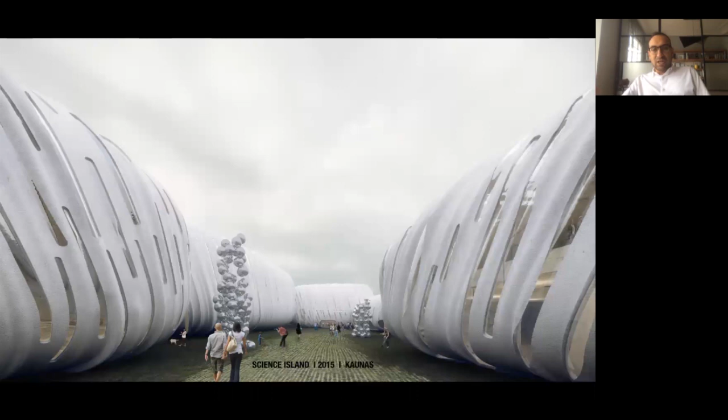So we looked at skins, organic skins, and looking at those, we come across Alan Turing's morphogenesis approach, morphogenesis theorem, let's say, where he wanted to make a mathematical background for these organic forms and relationships. By replicating this, we were able to generate openings and surfaces that relate to the surrounding in a more natural way.

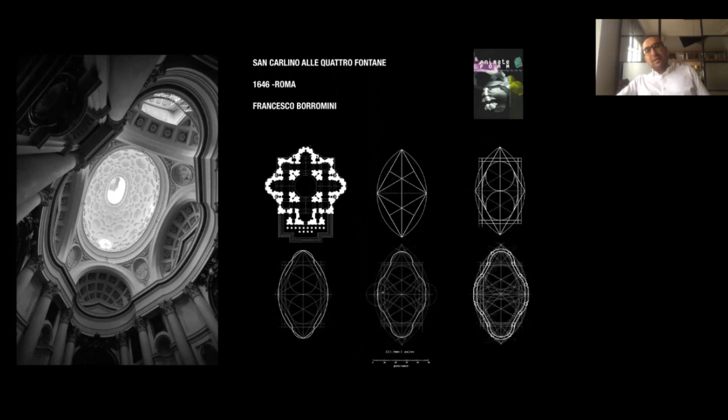But the beauty of it, I think, comes from how it is able to manipulate a small zone and site, which is not ideal for church building maybe, or maybe it's not the greatest church building site, let's say. But Borromini, who was by that time a young, very ambitious architect, painter, and also sculptor, used a strategy that defines new shapes and makes new forms, but it still is based on the same genetic code of the Trinity plan. So it still is a church, but recreated from its main ideas. There's a genetic point that this idea is rooted from. Another...

Example, maybe we tested a similar idea, was Augmented Structures, which we designed and built together with Refik Anadol in 2011. Maybe the time is important, because in 2011, at least to that date, we didn't see this kind of large-scale installation combined with digital footage.

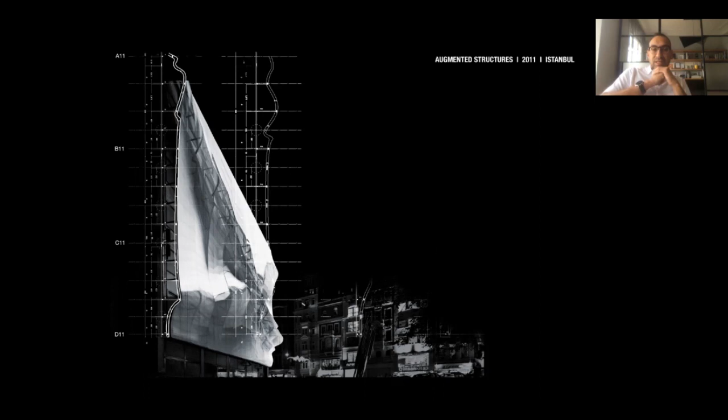This became real through a lot of constraints. We needed to build it in a very short time, in pieces, and we needed to combine it with a digital surface, so we didn't have any chance of making mistakes. It needed to be completely the same as the three-dimensional form generated in the PC. So designing it was a big challenge.

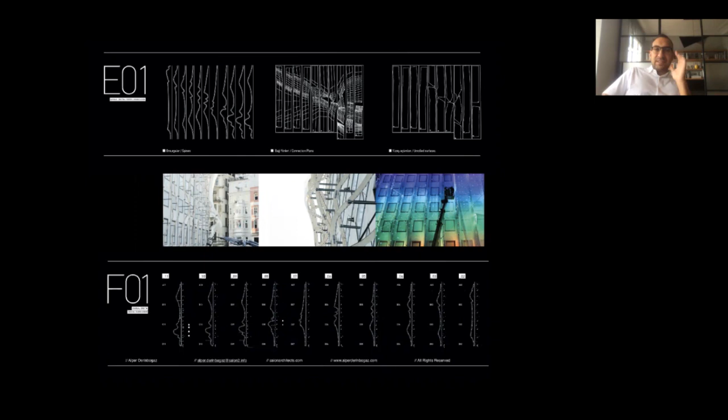Fabricating the surface was another challenge, and these are kind of residue from the process where we tried to capture the precise three-dimensional morphology and translate it into surface. You can see how CNC and all the CAD/CAM technologies were applied in the process.

There's a small video. The voices - if you can hear the voice of the installation - but this is online, and maybe if you are curious, you can go ahead and see the whole performance.

So time and the three-dimensional surface come together and become the architectural experience together. In that sense, I think it's a very interesting example in our practice also.

Another project on Istiklal Street in Istanbul, very close by to this Yapı Kredi Culture Center, was Fitaş Passage. So this project was also very much related with the facade, but beyond facade, it was a passage - but it had not been used as a passage for a very long time. It has been a movie theater, a shopping mall, offices, and a variety of things.

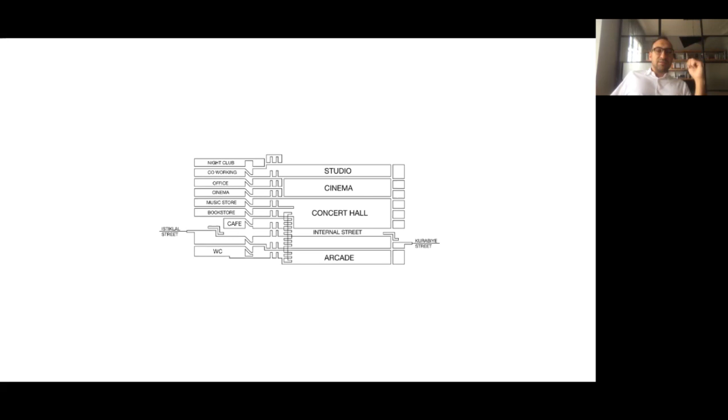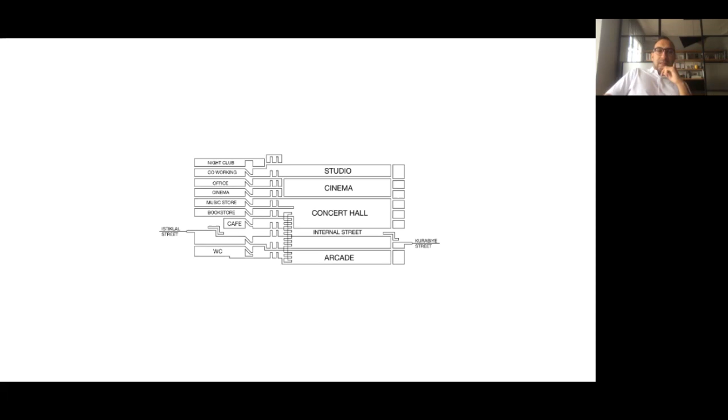So street and building become one, and this brings a new variety of spaces, also public spaces, into buildings, and buildings into streets. We thought this was important, to mix the public spaces together with the street.

So there's a texture on the surface, a spatial way of porosity on the surface. It goes up to the top floor in a different sense, so it kind of inspires you to go up into the building, we hope, at least.

Another project, where we were seeking a relationship with the surrounding, with time, and the space, was Ecotone.

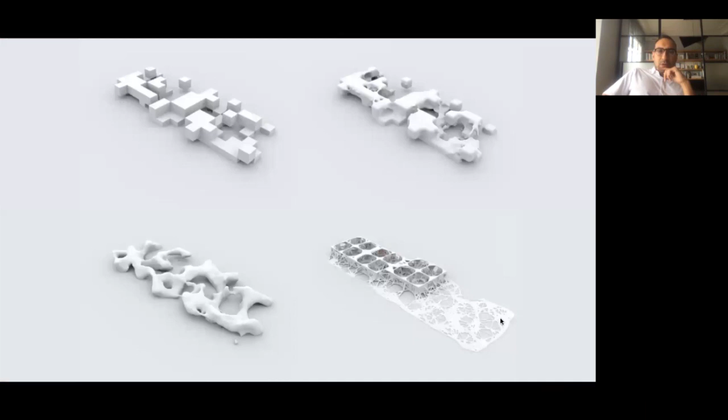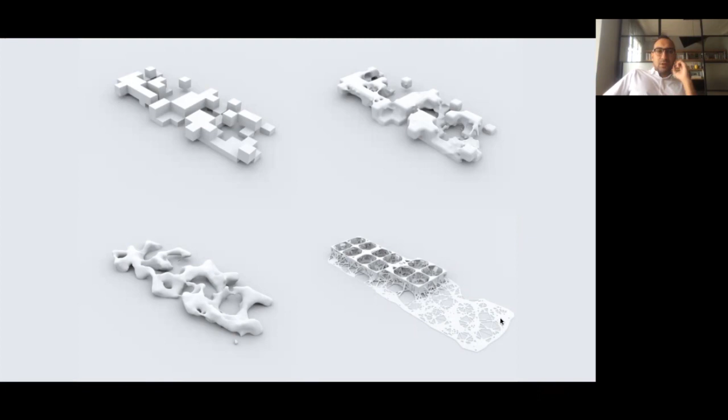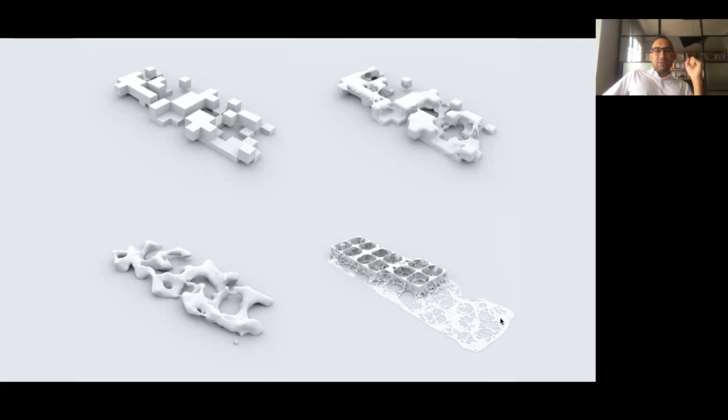So here in this project, we usually try to find relationship with the context, but in this case we wanted to create continuity between building components. When we are designing a building, we have certain building elements. We have spaces, empty spaces, full spaces, or elements like ceiling, walls, partitions, slabs, and all sorts of building elements. But we wanted to seek a continuity between these, so it becomes a holistic structure.

In doing that, we were mainly concerned by earthquake, because this building was proposed in a zone where we were not able to make foundations, so it would be a standing alone building. In this case, we wanted to come up with an idea that works against earthquakes, that is safe, but also not heavy—it doesn't exactly fight the earthquake, but works with the earthquake.

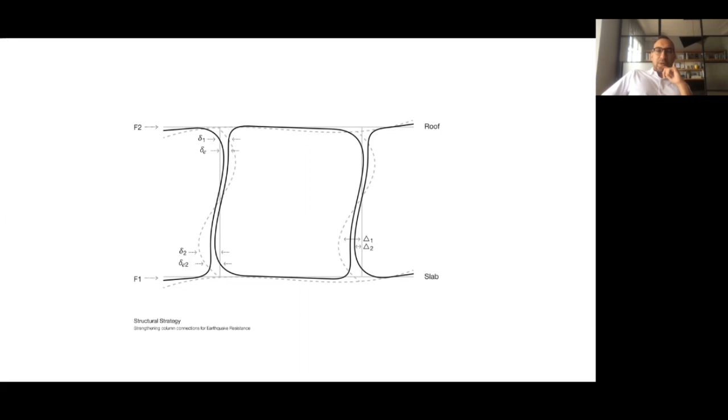So it becomes a more slender, more fluid space in that sense. And this is what we came up with: a column-to-column connection idea that is only thick where it is needed, and much narrower where it is not needed. So we kind of came up with an optimized column idea.

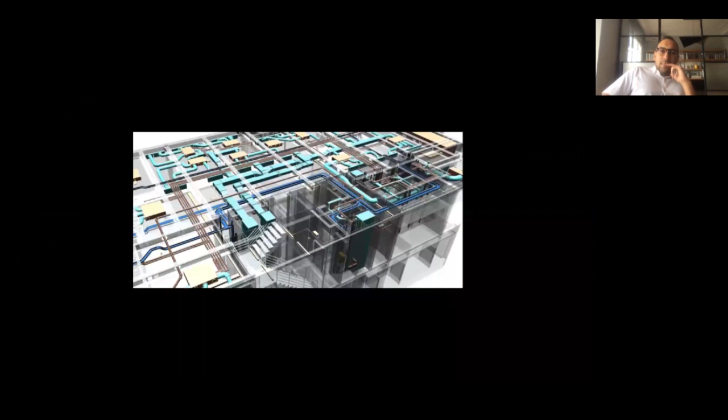Also, the spaces—the project is designed during the pandemic time. The spaces have a lot of meeting rooms that's outside, open out of the building. We also have spaces segregated in different pieces, so people can see each other, be still together, but they can also be in different rooms.

So we give a lot of importance to making a new type of office building where people can work together, feel together, enjoy together, but they are not necessarily in exactly the same air condition. They all have their own zones, which is much healthier for a pandemic situation. It's also nice because you can use exterior spaces extensively, and open spaces almost behave like closed spaces. So this was important to us.

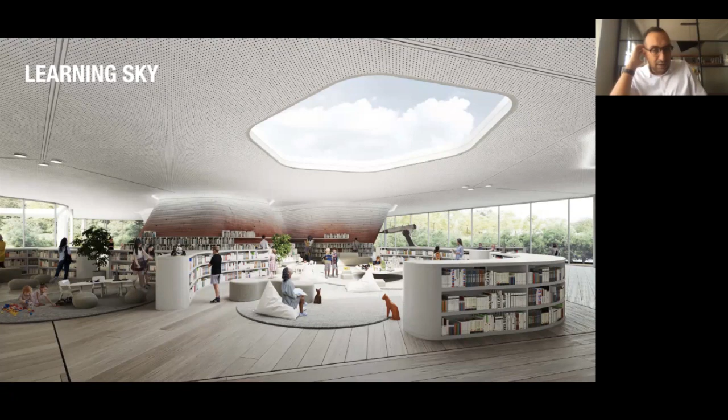Learning Sky is another project. We recently won an award in another international competition in Korea, in Songdo—the city of the future, as it's called.

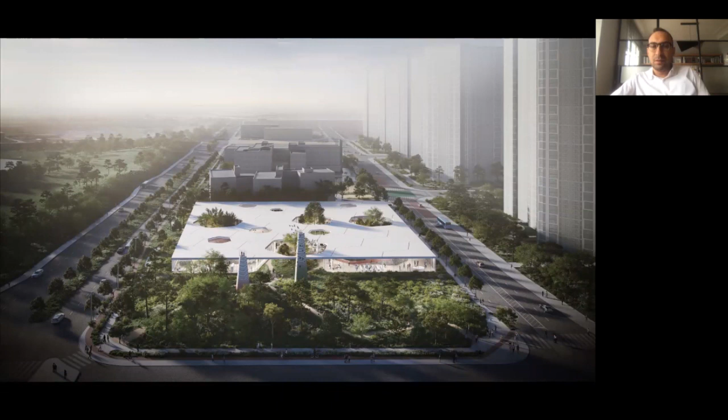Here we looked at the main libraries of Asian culture. We saw that a lot of the libraries don't have the exact Western library concept in Asia. As we went deeper into the subject, we discovered they have reading gardens rather than reading buildings. So we wanted to come up with an idea that is more about open spaces rather than closed spaces, and we were actually able to give a lot of nice places where you can read and enjoy nature.

And this was our main basic movement point.

Along the way we looked at the surrounding context, and we discovered it is located among a lot of innovation centers, some maker spaces, some factory buildings, and all that—which gave us the feeling that if you are making the future of the library, maybe it's not only about books, but also about making.

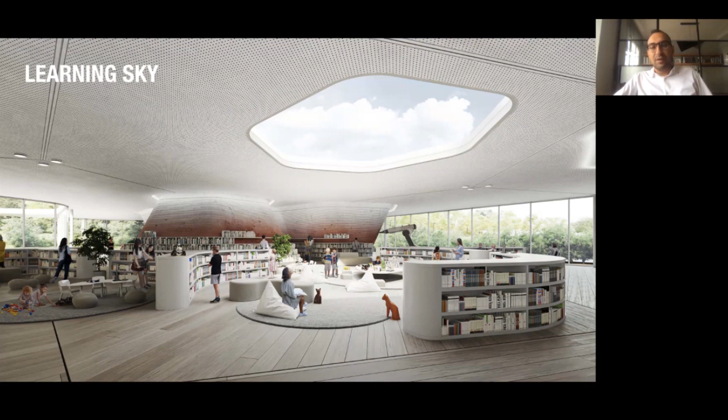So the making of the building is also part of this process. We came up with this idea where we build the building with 3D printers, because we believe printing changed the circulation of information and changes a lot of things. Information is not only written—it is sometimes three-dimensional, sometimes fabricated, and 3D printing is knowledge of form. If we come up with an idea that is also inspiring for making, then this becomes a culture throughout the experience.

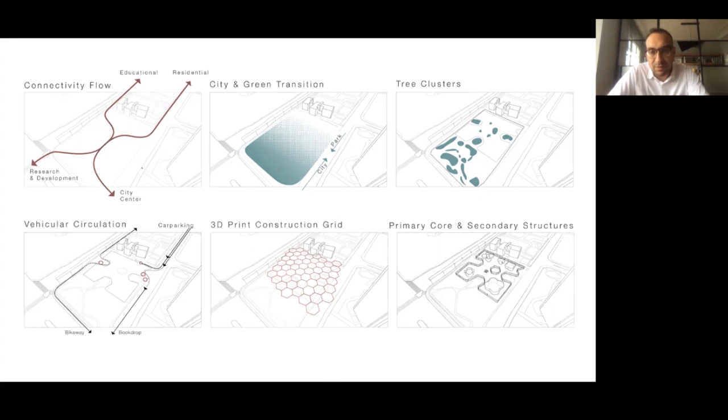And this is the building process. Basically, we came up with different strategies to make it connected with the city, but beyond that, we wanted to create a spatial grid that's mainly focused on 3D printing, and this became the structure.

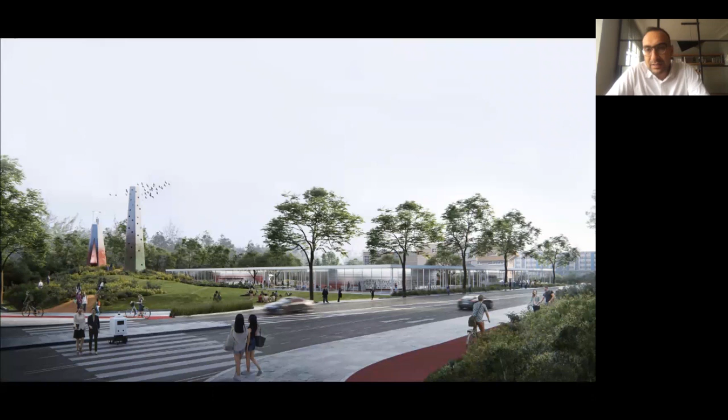But on the street level, against the cityscape, it is very low—quite a low-rise building. It has an attitude against the high rises and isolated spaces. It tries to be a space and a place, a destination rather than a container. So we wanted to bring this kind of influence into the making.

This is Modalities of Spontaneous, a root idea that kind of shapes our practice, our root research. We were invited as one of the exhibitors in the Turkish Pavilion in the first debut attendance of Turkey into Venice Biennale in 2014, where Rem Koolhaas was the curator. It's called Modalities of Spontaneous because we were looking at Istanbul, we were looking at different cities, and we were trying to understand what spontaneity comes from in the cities.

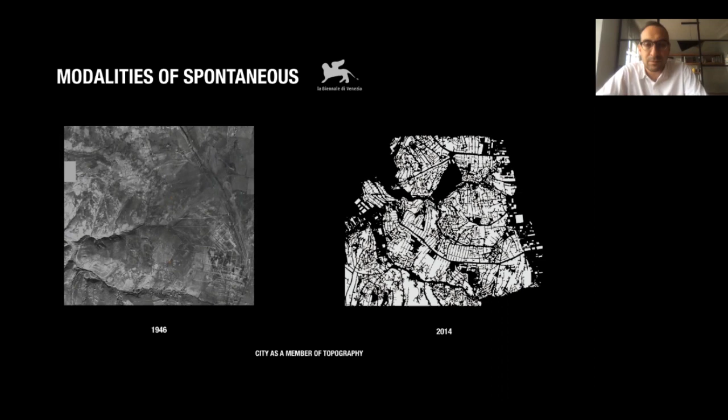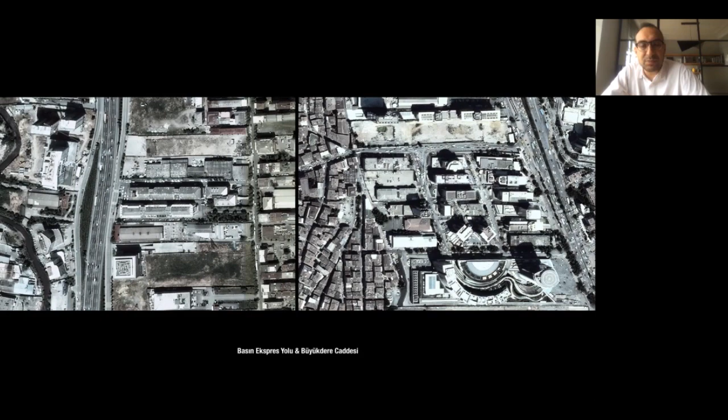So when we look at different samplings of the city from different zones, we have seen similarities in between these spaces. There's a geographical condition where you have a waterway, and this used to be owned by farmers before. They become industrial zones, office buildings, plazas, and so on in the specific Istanbul case. We've seen this repeating pattern in a lot of different locations, and we started to discover some underlying geographical conditions resulting in this. So we depicted 6 frames from this understanding of the space, and came up with formal studies to understand the becoming of the city, developing different frames through that.

By the time we were working on the project, after we worked on the project, we were invited for a competition for Istanbul City Museum in 2015, and still up to date we are working on it.

The project came after our Venice Biennale exhibition, and we were already trying to understand how the geography in correlation with history makes the cities. If we understand these relationships, we could propose better spaces, better buildings for the future. This was one of, I think, more concrete examples in that sense.

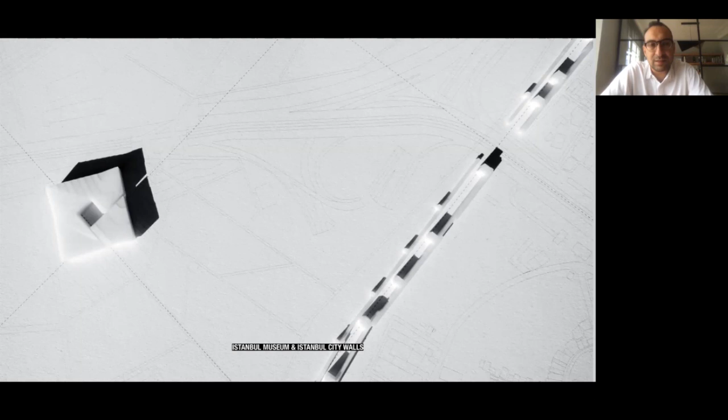We positioned the building - the building location was given to us. We positioned the interior of the building in relation with the city walls. We tried to develop this idea, this relationship with the city walls, and we connected this entrance access to the public transport hubs, and we used a lot of the contextual formations to reflect on the building.

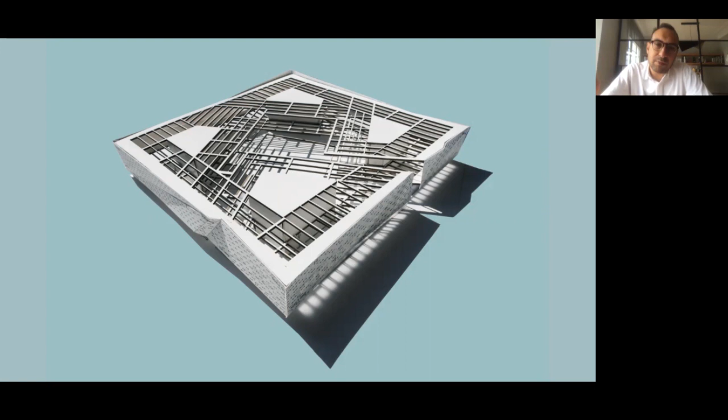Then we came up with this square type of building, but much more diverse in the interior, because of the exterior context, the relationship with the land walls. We brought in a different dimension into the building, and this was kind of creating a dialogue. We didn't want this to be a clash, but we preferred it becoming a guiding outline for us. Through that, we were able to develop very high spans of structure, so we were able to create a lot of space for exhibitions.

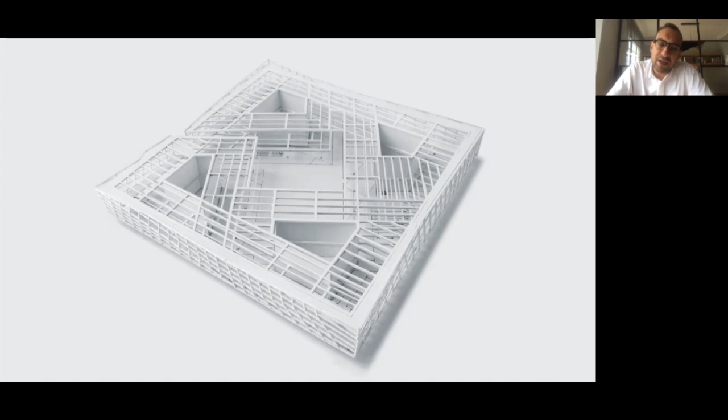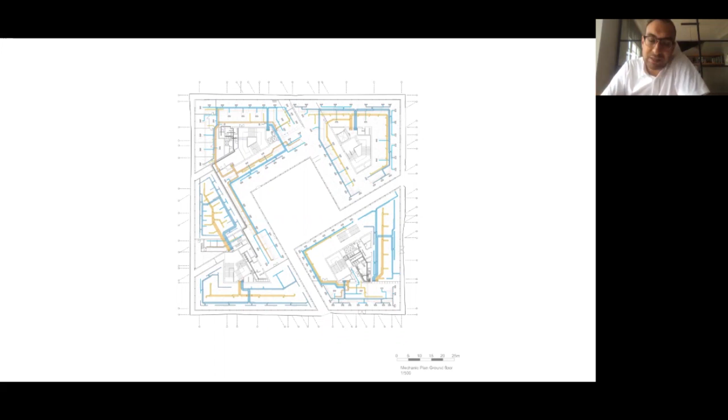Beyond the scene, there's also a lot of space for storage, for laboratories, for infrastructural elements, because we think it's very important to create infrastructure, foundation spaces beyond the public spaces. What we see as buildings, as museums in our context, is usually the visible part, but beyond the visible part, the building needs to work nicely so it can serve the community for longer years. We are not working to make the museum into a single exhibition, but we are looking to see how a living museum can be created. This is, again, some residue from the process - this is, I think, our inspiration from the land walls.

We wanted to see how different layers of making, combined in the same surface, could come up with a new spatial context, because this is not only the facade of the building but also part of the city, part of the square, part of the context. So we wanted to bring in different layers into the facade, and we wanted to make it visible.

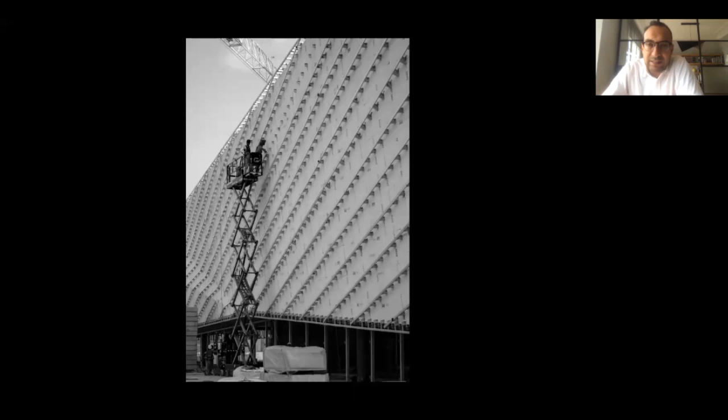This has been under construction since 2016. We are about 70% of the completion of the building, and it is still going. The building went through some economic setbacks, and now, together with İmamoğlu, it is going for the next stage of bidding, so it is aimed to be completed within a year.

This is from the facade mock-up. We are looking for a materiality that reflects the surrounding, because it's located inside a very nice park. We hope it is going to reflect the surrounding, reflect the weather, reflect Istanbul on the surface. And we are working really hard to make this scrap-free, let's say, trying to evaluate as much as possible the existing materials into the building.

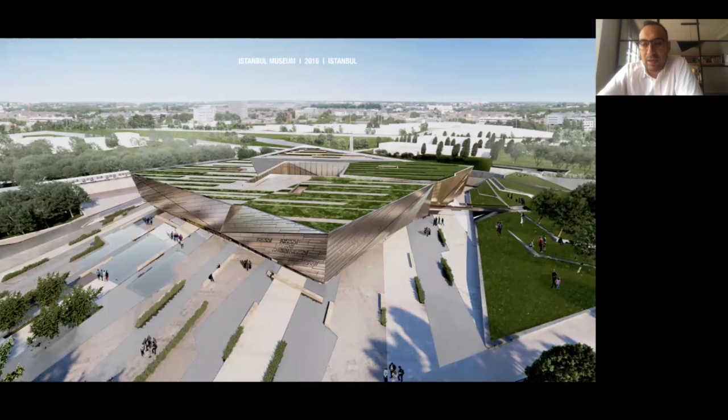We work with a variety of consultants, from London New Technique to Peter Bauer in Vienna, to Istanbul Balkar. We are working with a lot of different layers of engineers and consultants. Luca Molinari is the curator—Italian, very famous, an important editor and curator—who has been working on the exhibition for many years. It has involved more than 200 professionals to date, and it's a very important project for us.

Maybe it's nice to close it with a small video of it.

I don't know if the sound is hearable. So maybe I'll jump a little faster in case you don't hear the sound.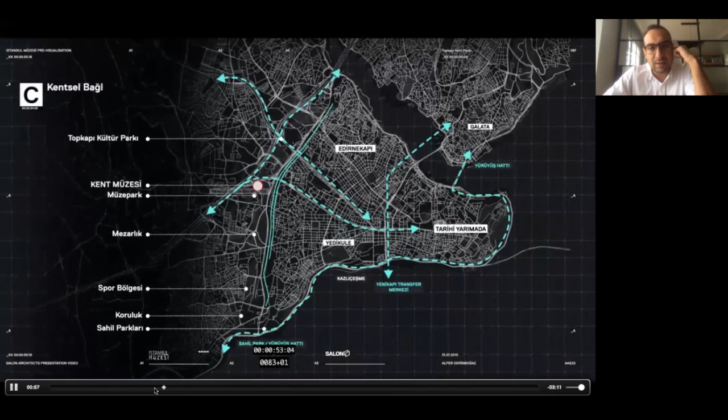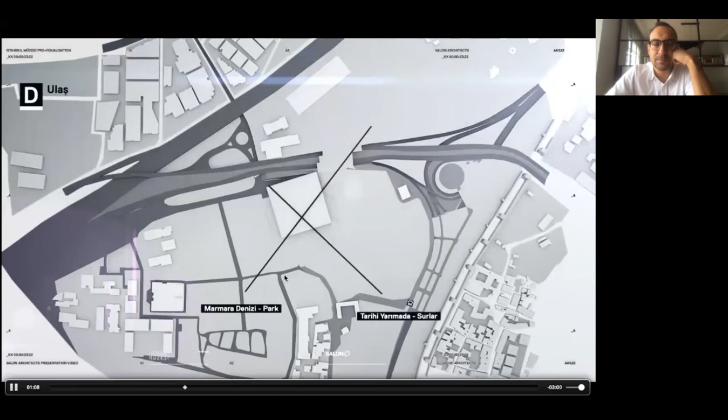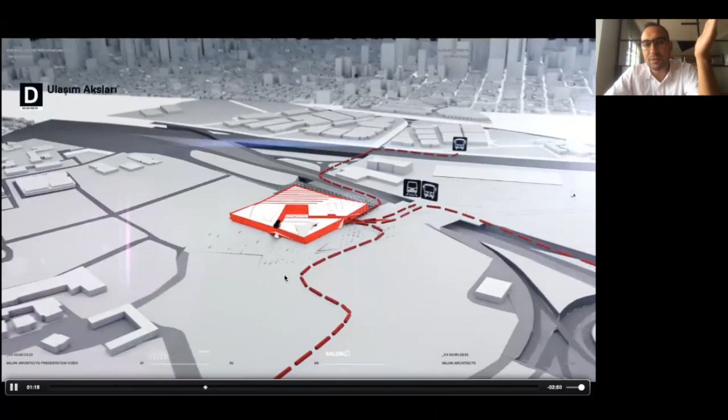Like I said, it is located next to the historic peninsula. This becomes very important because this is the building iconically located at the breaking point of the city, where the historic city ends and the modern city starts. We thought this was an important thing to emphasize in the making.

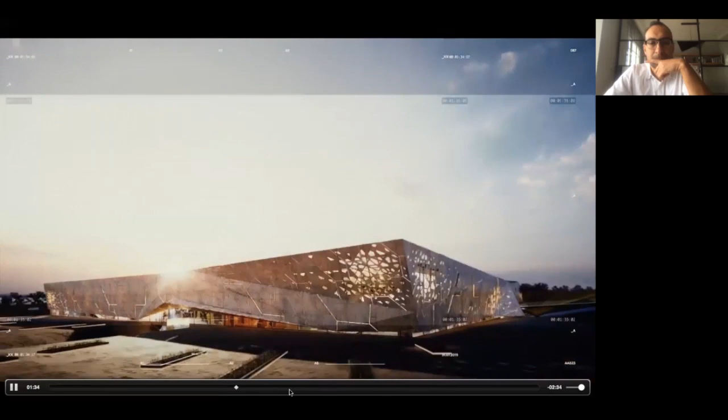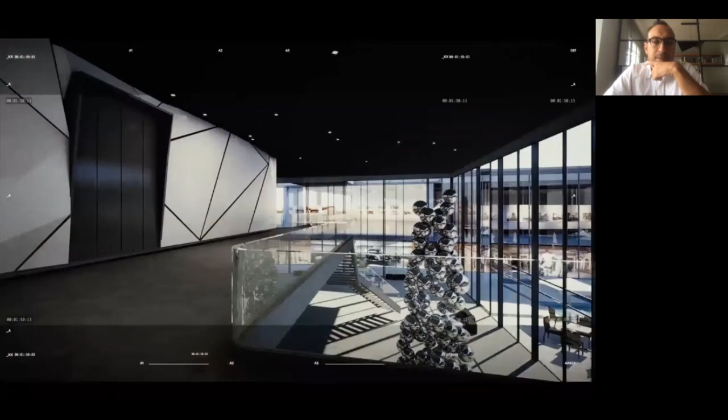There's a welcoming bridge that invites people inside. There's an atrium at the entrance, and there are different divisions of the city. It simulates how we meet with Istanbul through the sea, because a lot of the visitors come from the sea, and we wanted to see how that would be reflected onto the experience of visiting the city.

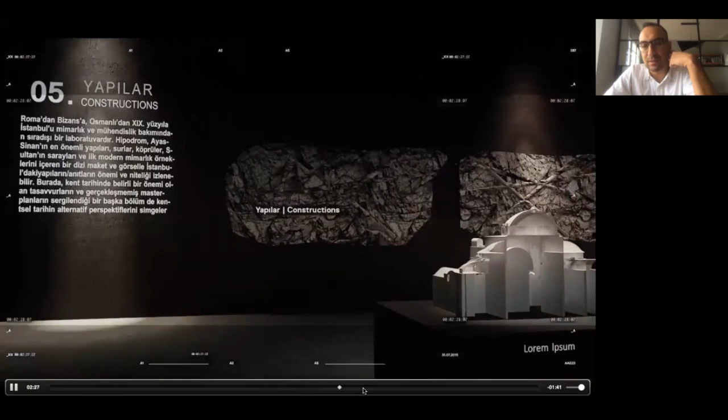Beyond everything, it's this people's museum—Istanbul's public museum. So it reflects people's stories also.

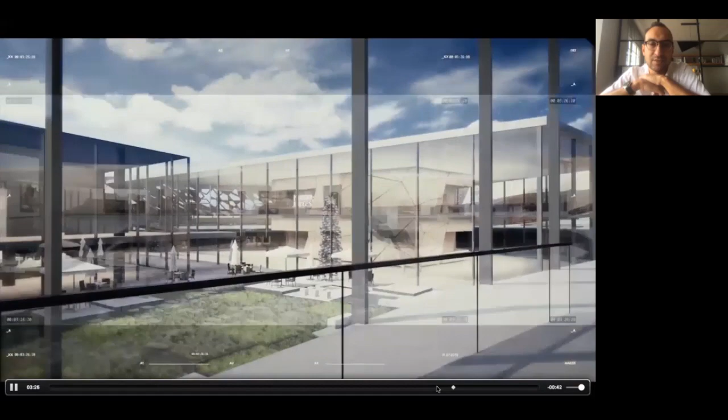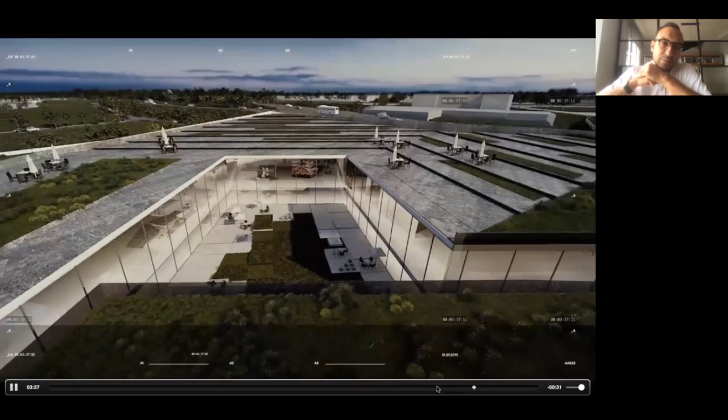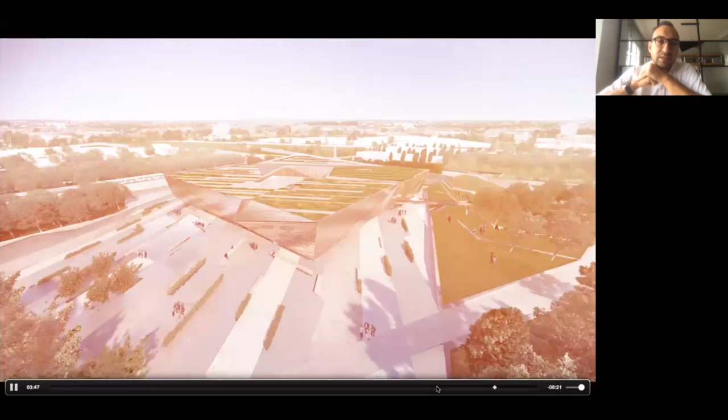It ends up with contemporary Istanbul—how we are living the city, how it is being affected, how it is being reflected, and how we are interacting with the city—that's the end of the exhibition. The exhibition ends with the city itself, so when you go up to the terrace, you are able to see the historical context together with the modern Istanbul.

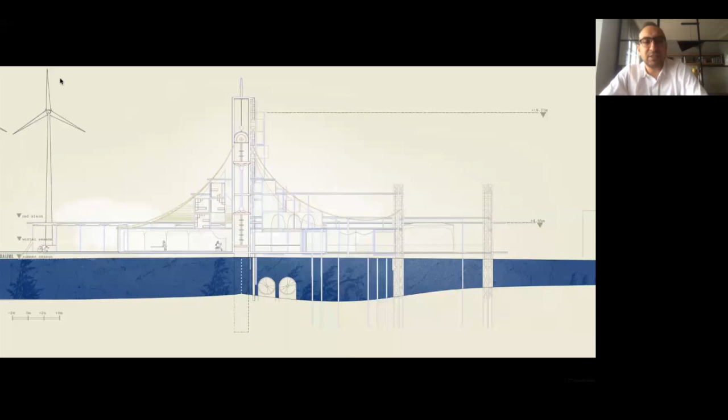I didn't do everything on my own. There has been a lot of people we have been working together with. So I think this is mainly my presentation—I wanted to leave some space for Q&A.

We also test these ideas in school. We are inspired by a lot of great writers, from Timothy Morton to Graham Harman, in making our ideas. Donna Haraway is a very important writer, researcher, scientist—she talks a lot about how we have a relationship crisis with the earth, with our surrounding. I'm very much inspired by that.

Bernard Cache's 'Earth Moves' is a very inspiring publication again—I think it gives a lot of clues about how our cities, in the Turkish context, in our geographic context, have a spatial relationship with the geography and how they're correlated.

Lefebvre is, of course, always a great inspiration for our making. More contemporary examples like Benjamin Bratton's 'The Stack,' the new normal—he has been a very speculative writer across a variety of things. Superstudio—they haven't built any buildings, but they have been extremely influential in architecture, and in our practice too. I recommend students to look at them extensively.